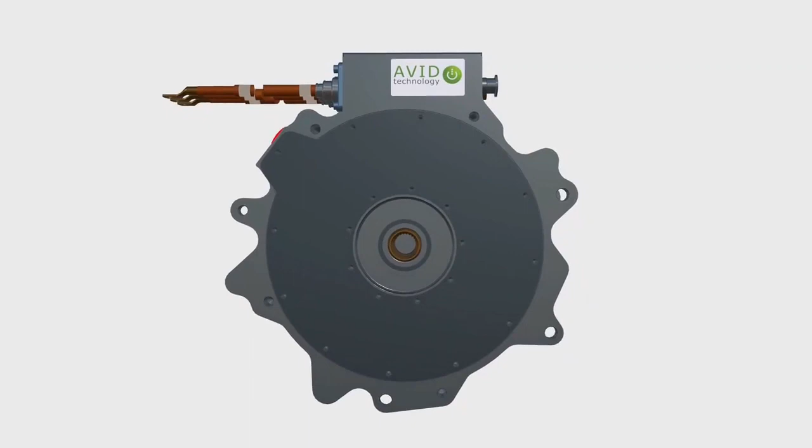Avid Technology designs and manufactures highly efficient and power-dense motors and control electronics for a wide range of applications, from electric and hybrid vehicles to industrial robotics. This video sets out to explain the key permanent magnet motor variants and where they might be used.

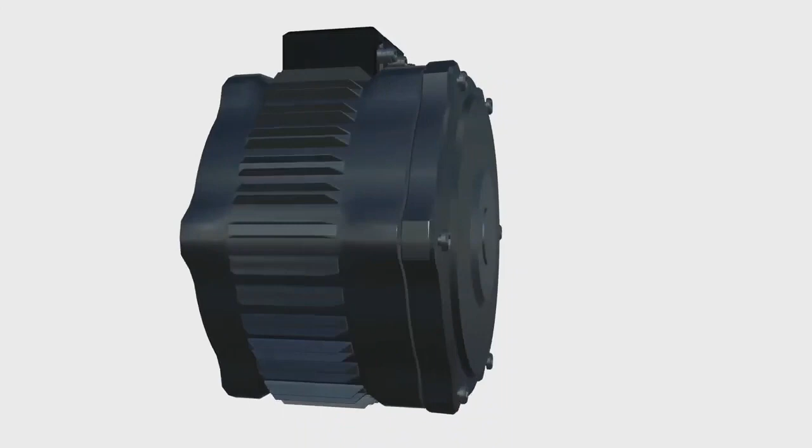Radial flux motors are by far the most common type of electric machine. In this video, we will focus on permanent magnet radial motors. There are also switched reluctance and induction machines, but these are deliberately excluded.

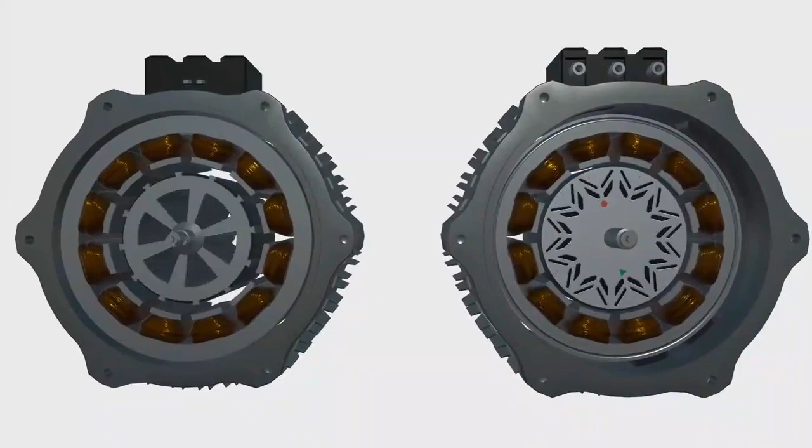In a radial flux motor, the magnetic field is radial to the rotational axis of the shaft. There are two key topologies and several subclasses within that. In this type of motor, the rotor spins inside the stator. Avid has extensive design and volume manufacturing experience of all types of radial interior rotor motors.

The first kind of internal rotor motor we're going to look at is known as a surface magnet, or SPM, motor. In this type of motor, the magnets are mounted to the surface of the rotor, typically bonded in place, held in position by a composite tape or manufactured as a ring that is wrapped around the rotor.

This style of motor is used in a wide range of applications where high efficiency is required, and also for high-speed applications. This style of motor is typically highly efficient because the torque is generated directly by the reaction between the magnetic field of the surface magnets and the fields generated in the stator teeth by the windings. There are minimal rotor losses, as the magnetic field from the magnets is directly acting in the air gap.

The key disadvantage of this kind of machine is a relatively high proportion of magnetic material for the torque of the machine compared to other types of motor, and the increased manufacturing costs, especially when considering filament winding to provide a high strength retention of the magnets.

The second kind of IR motor is known as an interior magnet, or IPM, motor. In this style of motor, simple bar magnets are slotted or moulded into punched holes in a rotor core manufactured from a stack of steel lamination sheets.

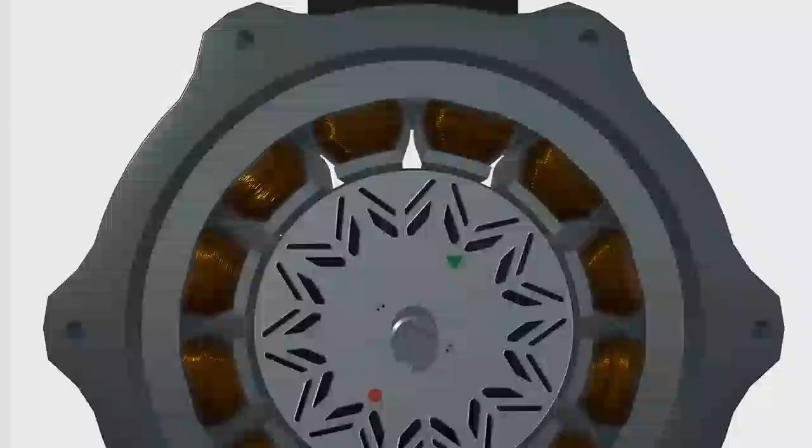IPM motors typically use less magnetic material than an equivalent SPM motor, reducing costs. The magnets are also mechanically located in the slots, removing the need for any banding. In addition to the magnetic field generated by the permanent magnets, they also typically use rotor reluctance to enhance the magnetic field strength at the surface of the rotor.

Whilst this improves the torque to magnetic material ratio, it reduces peak efficiency under high torque when compared to SPM rotors.

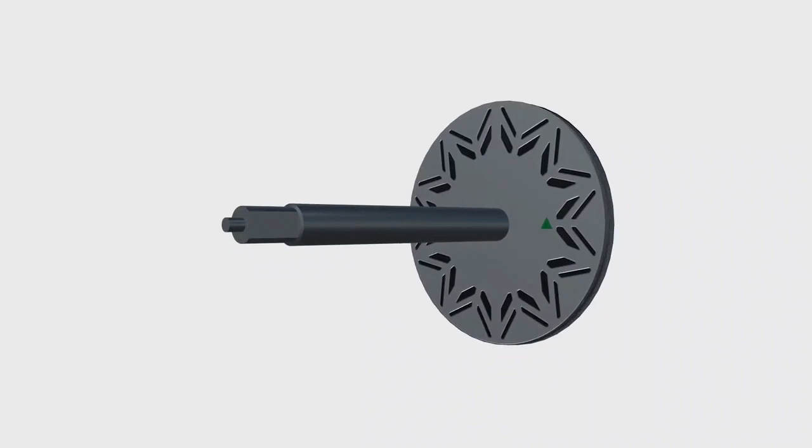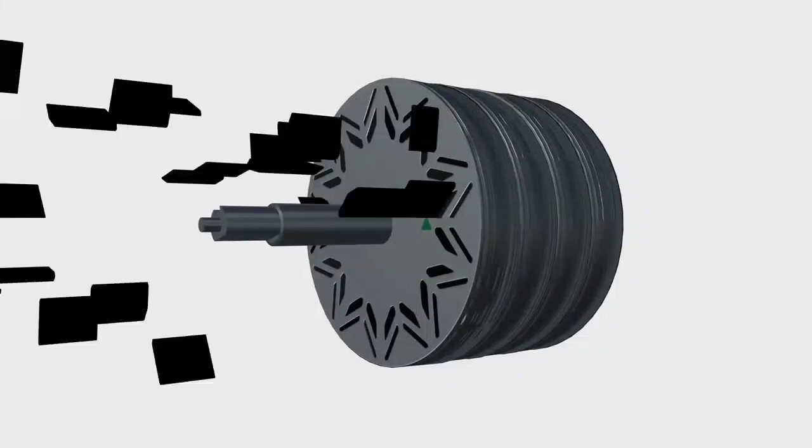Although no banding is required, the assembly of the rotor can be complex due to the use of multiple layers of lamination steel and magnet arrays. The need to insert many small magnets into the slots requires complex automated machinery for volume production. IPM motors are popular for electric vehicle traction applications.

ERPM motors provide more torque at lower RPM due to the improved mechanical advantage offered by the larger radius of the active magnetic surface when compared to an IR motor. This makes them well suited to certain applications.

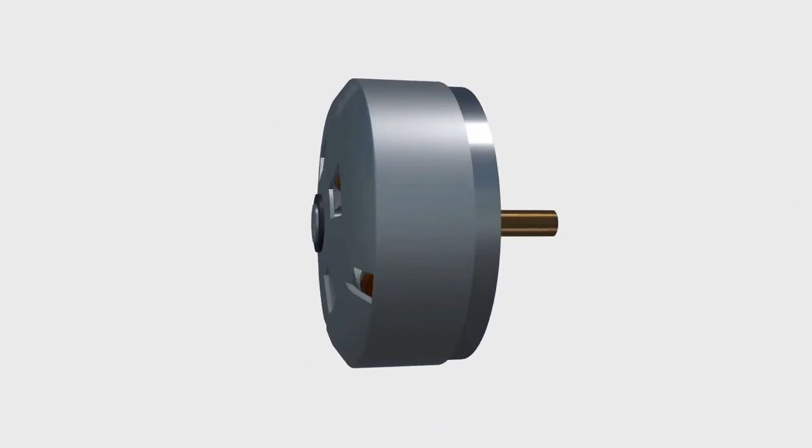The weakness of an ERPM motor is the difficulty cooling the stator and rotor compared to an IR motor, where there is a good thermal pathway from the stator to the motor housing. On the ERPM motor, the stator is inside the machine with no thermal pathway, and it's difficult to route liquid cooling into it. Sealing of the ERPM motor assembly is also more difficult, as the moving part is external to the stationary part, which typically means that two sets of clearances need to be maintained in a housed motor. Finally, the rotor has a relatively high inertia because the rotating mass is mounted far away from the central axis.

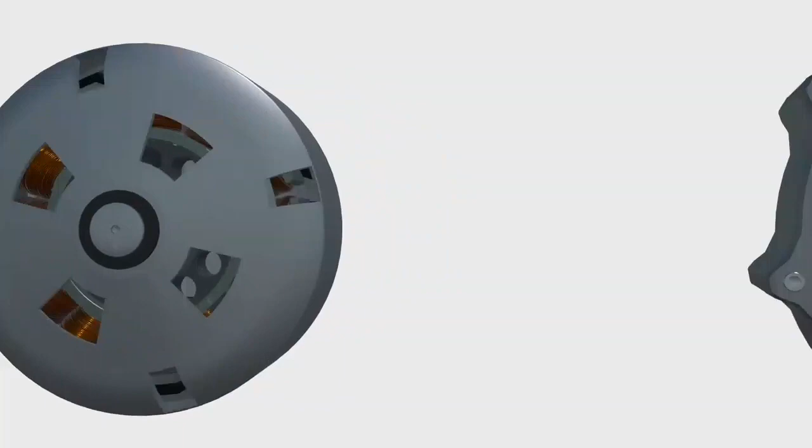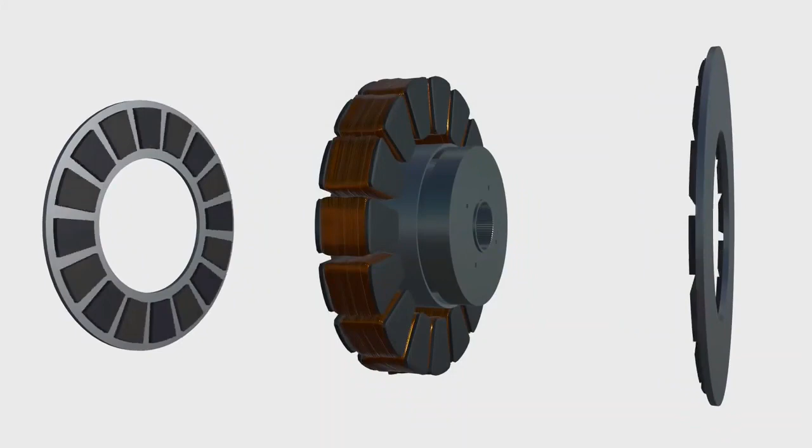Unlike a radial motor, axial flux motors feature a magnetic flux that runs axial to the rotation of the motor rotor. They're sometimes called pancake motors due to their flat shape, which is possible because the active magnetic surface is the face of the rotor rather than its outside diameter. This allows an increased active magnetic surface area compared to a radial motor, and typically improved performance in terms of power to weight and torque density.

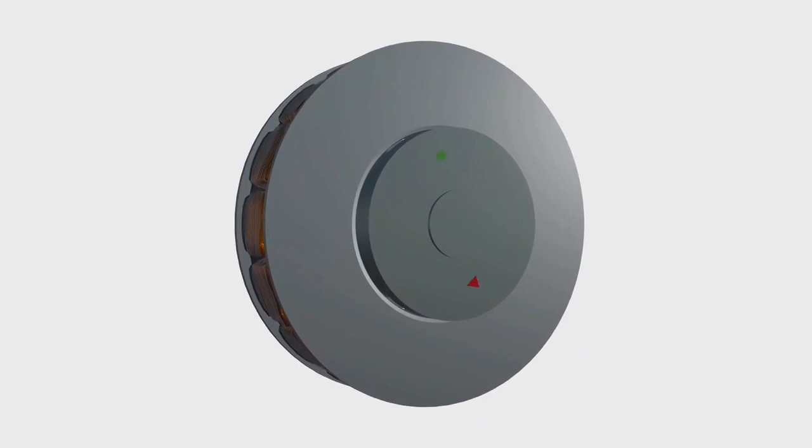There are two key axial flux motor configurations: internal stator external rotor, and external stator internal rotor. The internal stator external rotor axial flux motor, sometimes called a torus axial flux motor, has several key advantages.

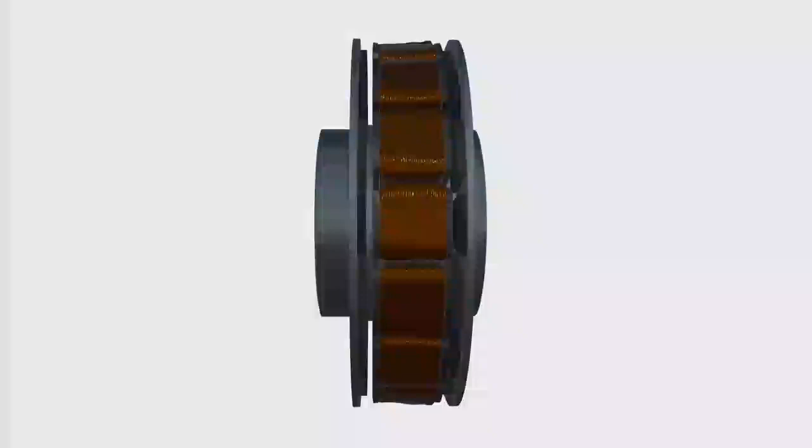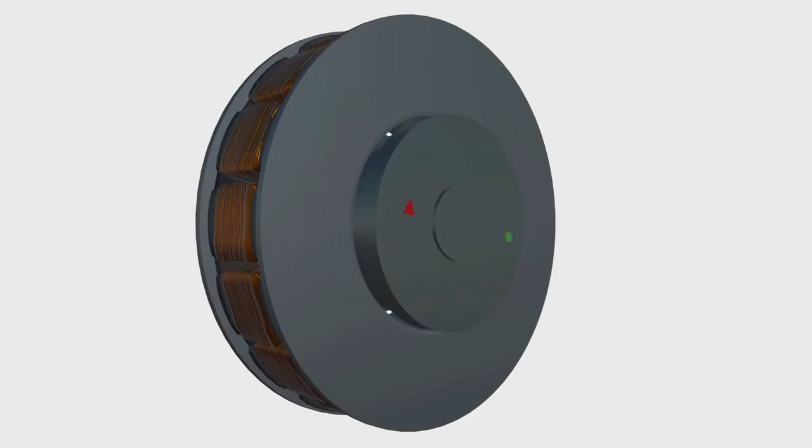The benefits of this type of motor are compact stator windings that are easy to mass produce and reduced motor copper content. However, there are some significant disadvantages, which include often complex rotor forms leading to rotor stability issues and requiring complex control. These machines have a high rotor inertia. It is often difficult to cool the motor, requiring separate oil cooling systems that negate some of the power density benefits of the motor, and it can experience high levels of torque ripple from the segmented stator.

The double stator single rotor axial flux motor, sometimes called a DSSR, is one of the most power and torque dense motors available on the market. The benefits of this design stem from the simple rotor, which is very stable and compact.

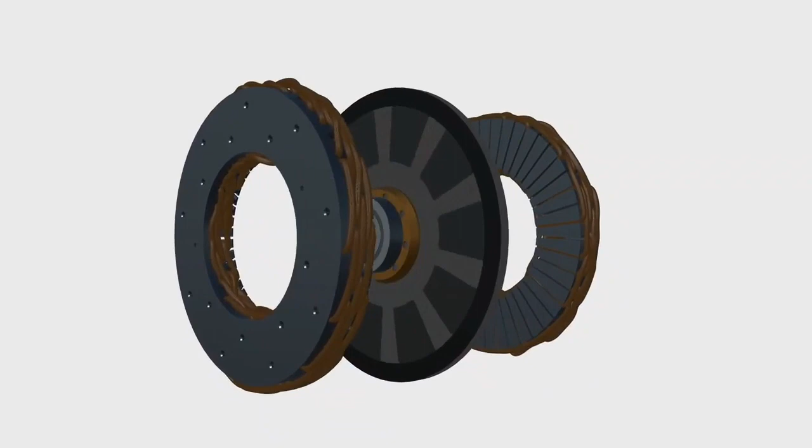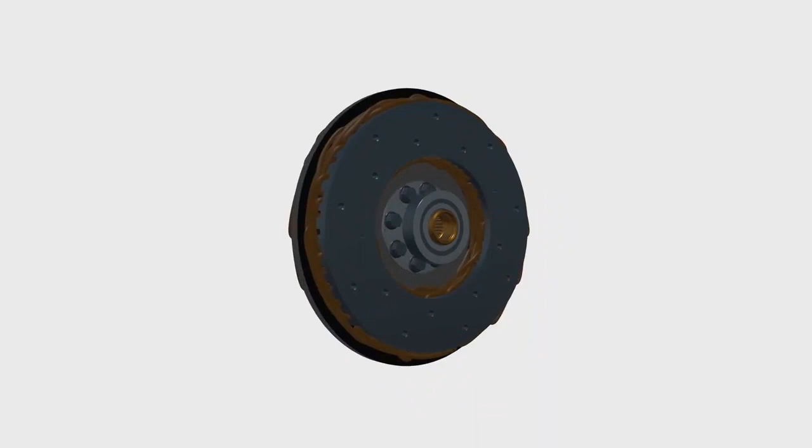It has a reduced rare earth magnet content compared to most other PM motors. It also has a very large heat rejection surface area from the rear faces of the motor stators, meaning it is easy to cool, which delivers good real-world performance and high usable power and torque density.

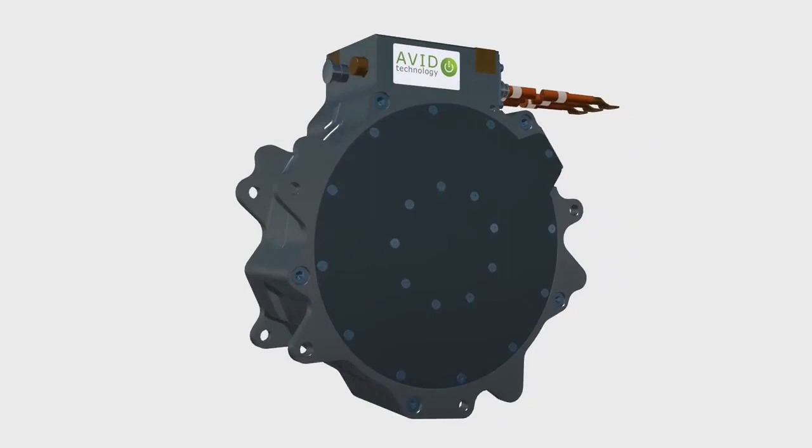The housing is also easy to fully seal, which makes it ideal for harsh environments such as electric vehicle drives, hazardous area robotics and aerospace. Avid's patented Evo machine also has an ultra-low inertia composite rotor. This can significantly improve transient performance of this motor.

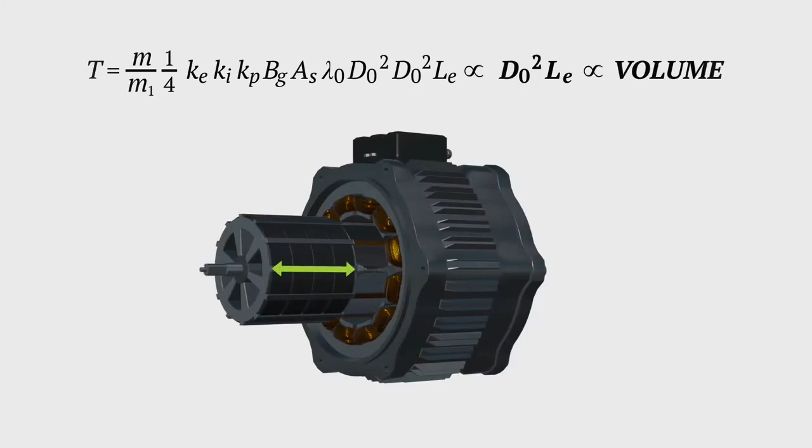Here we can see the sizing equation for a radial flux motor. The torque density stays the same for a given length of machine. It can be seen that the radial machine increases its torque to the power of 2 of the diameter. Power density then comes from torque density times speed.

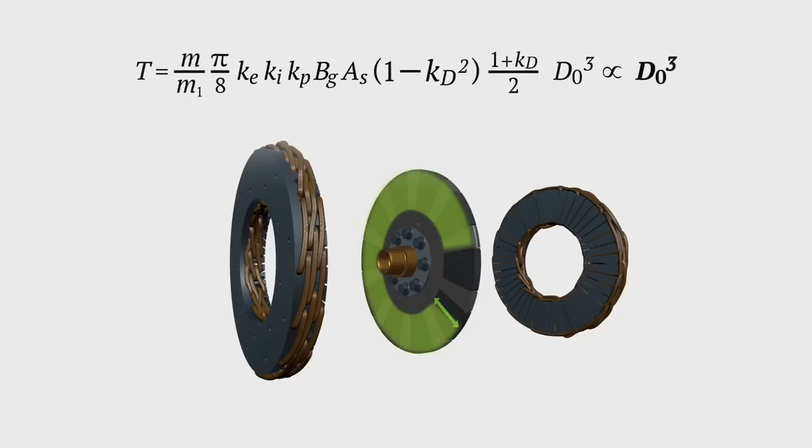Axial and radial flux motors have their advantages and disadvantages, meaning they're both suited to a wide range of applications. Deciding which type of motor will perform best for a particular application requires a more in-depth study of the application requirements. If you're interested in learning more about radial and axial flux motor design and manufacturing, or have a specific requirement for a high power density and efficiency motor drive system, contact Avid today.